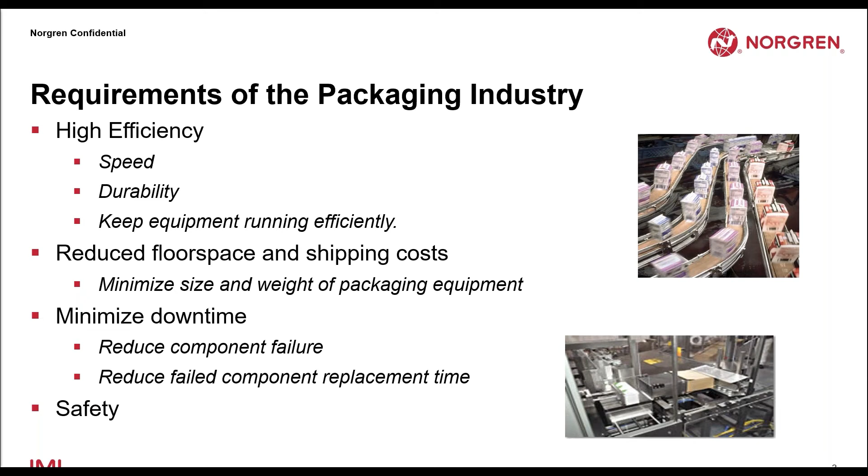So air preparation can provide solutions for many of those issues. Filters, regulators, lubricators, or FRLs, can affect the speed, efficiency, durability, quality, downtime, and safety of the system. We'll go into a little bit more detail as we go into this. Also, their size and weight can affect the envelope size, therefore the floor space, and also shipping costs. You have a bunch of heavy components on the equipment, and it affects shipping costs.

Shut-off valves and soft start dump valves are items that people just generally don't even think about. And again, it affects safety, durability, and the downtime of the line, and we'll talk a little bit more about that.

And finally, pressure switches and sensors. We're in a world where we want to have more control, more information, more connectivity. What pressure switches and sensors do is allow you to monitor and control different equipment, and it affects efficiency, durability, quality, and downtime. So all these three items are key to meet some of those characteristics we talked about in the original slide.

Norgren has been a leader in air prep for many, many years, back from when Carl Norgren invented the first inline lubricator in 1927. We've had our flagship Excelon line for many years, and it's been the dominant air prep unit in the industry. Now we have our new Excelon Plus range, and we're really excited about it.

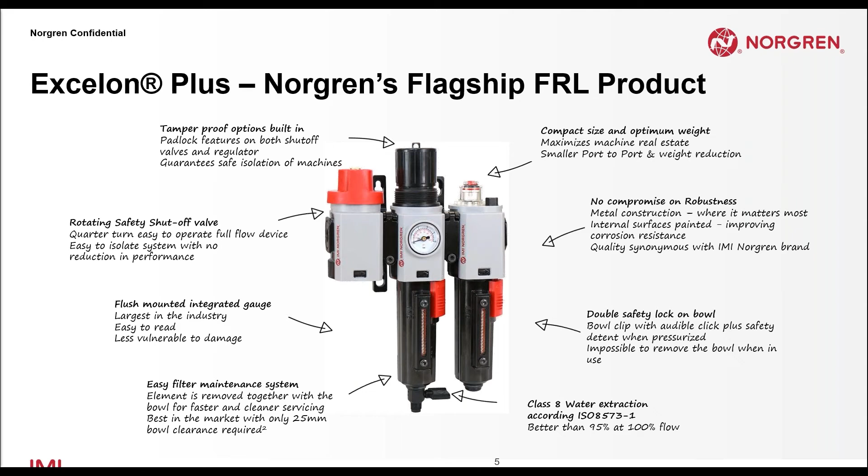Now let's talk about the keys in pneumatics. Speed is critical, as we mentioned, and speed is equal to flow. For the Excelon Plus, you need plenty of flow, and this unit has extreme flow for its envelope size. You want to get the most flow you can out of the smallest envelope, and the Excelon Plus does an outstanding job of that.

We've got flow demands from 65 SCFM to 265 SCFM, which will handle most of your requirements. We do have bigger units that aren't on our flagship range that are modular, which will allow you to get to much higher flows too if you absolutely need it. But generally, when you're in these ranges, you'll be able to get the flow you need in the smallest envelope size there is.

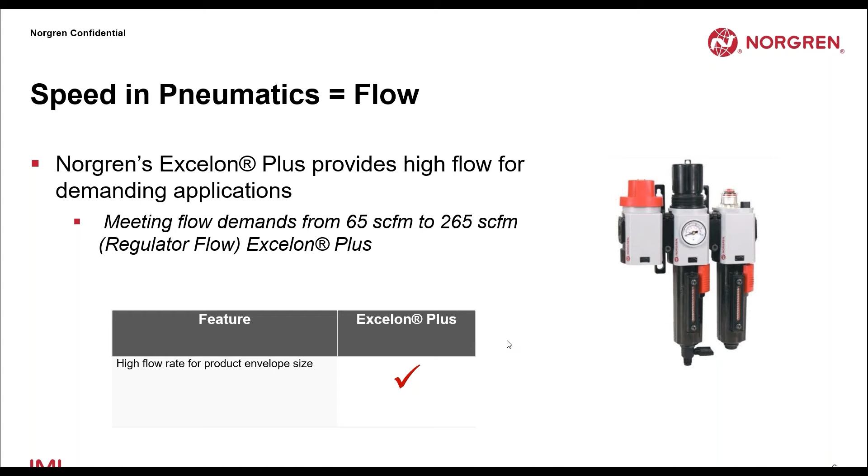Another key item we want to be concerned about in the packaging industry is durability. We talked about wanting to keep that equipment running - it's high speed, we need to keep equipment running, we need stuff moving fast. So we don't want any of our components breaking down. It's key that all the components are durable.

In the case of Excelon Plus, a lot of people look at this and think, oh, it's a plastic unit, so it's probably not very durable. But as you can see, you take off these covers and all the key parts are metal. Very similar to what we have in our previous flagship Excelon range, which Norgren is known for having the most durable equipment in the industry for air prep. We have metal all the way through.

We have covers that cover it up, and we did that to get our weight down. In addition to being robust, we want to make sure we have that robustness at the lightest weight and size possible. We've done an excellent job with Excelon Plus, with a small port-to-port, lightweight unit and a small envelope size for the amount of flow you get. So extremely durable, high flow, lightweight, small envelope size - port-to-port is as good as anybody in the industry. Really did a fabulous job with Excelon Plus, really good for your industry.

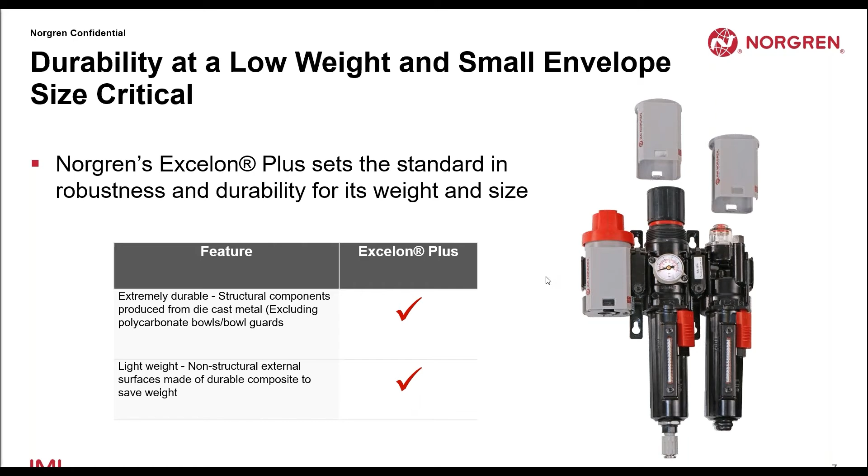Now I'll talk a little bit about modularity, because it provides reduced work time, reduced downtime, as well as increased flexibility. One of the key things is if you have something that fails, you want to be able to change it out quickly. You don't want your line to be down, and that's key in an industry like packaging, where you're moving so fast and have things going so quickly.

Our Excelon line had our Quikclamp system, and this has our Quikclamp system too. Really easy to change out parts - it's modular. If you have a product that fails, you can just loosen two screws, flip the unit open, pull out the damaged unit, replace it with the new unit, flip the two arms back up, and tighten the screws back down. So once you have that product replaced, it takes less than a minute to change this thing out. Really fast, keeps your lines up and running.

The top pictures here just show the brackets without the units, and down here shows the units. You can see how easily it works, and it really works effectively.

The other huge advantage of having these units modular is if you decide, for example, it'd be nice to have a soft start dump valve, you can add one onto your system just by adding a Quikclamp, so you don't have to do any substantial piping. It really gives you a lot of flexibility for adding components, much easier than starting from scratch.

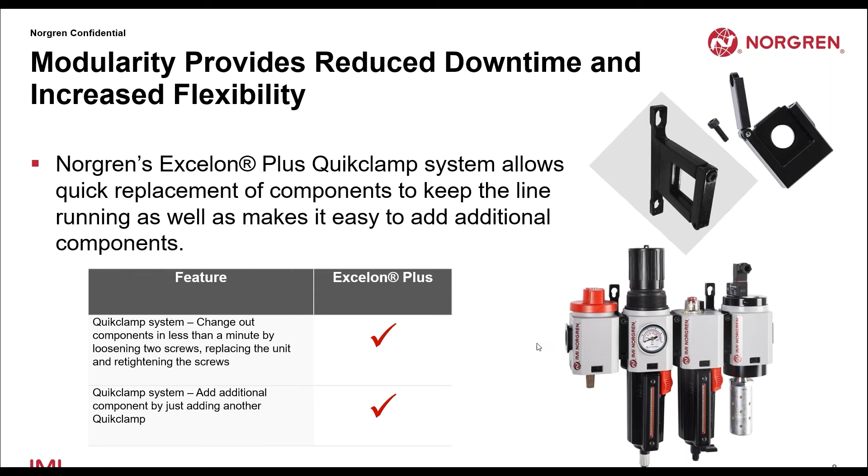Now we'll talk about some more of the individual units.

Filters are key in any system. If you look at any pneumatic component, we make valves, we make actuators, and just like everybody else's warranty, ours says that warranty is good only if you have clean, dry air. To keep equipment running efficiently, you need to keep contaminants out, and that's what filters do. If you want to stop systems from breaking down or clogging up, you really need filters.

In this case, you have a general purpose filter, and in the case of Excelon Plus, we have an industry best water extraction, meeting class 8 of the ISO standard. We are able to move out water as well as anybody, so it doesn't damage your system. Our standard filtration options are 40 and 5 microns.

Most standard packaging applications, 40 micron is fine. If you have special requirements, some specific equipment that needs greater filtration, 5 micron works. One thing to point out: a lot of people think 5 micron is better than 40 micron. It's not - it depends on what your application is.

If you use a 5 micron element in an application that could live with 40, all that means is you're going to clog up that element faster. It's going to make your compressor work more, and you'll have to change that element out more often, because these units work where once a filter element gets clogged, you replace it. So make sure you understand your application and use a 40 when you need a 40 and a 5 when you need a 5.

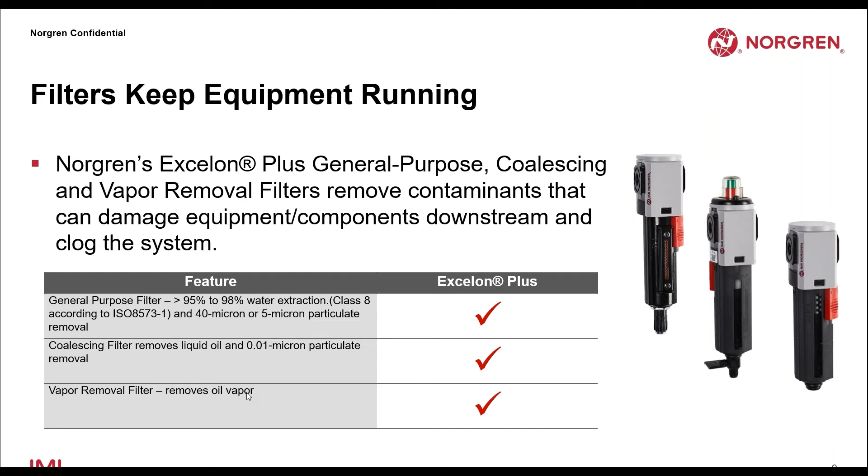Now the Norgren filters have some additional advantages - the Excelon Plus units - over some of the competition. The first thing to talk about is the dual safety lock bowl.

Again, we want to make sure this bowl is secure on there, since you're having pressures on the units. So what we have is a double locking system. At the top of the unit, there's a detent, and basically when you get that bowl in place and it's pressurized with 2 or 3 PSI, you can't get that bowl off. So once it's pressurized, you can't get it off. That's the initial locking mechanism.

In addition to that, we have a clip lock, which basically, when you turn it into place, it'll actually click or snap in place, so you know the bowl's fully engaged. To remove the bowl, you have to pull that clip down and twist it the other way around. Again, that stops that bowl potentially from vibrating loose if there's no pressure in the system, giving you additional safety to protect your employees, which of course is key in really all industries.

The other item I mentioned is that we have both manual and auto drains. With manual, you have to drain it yourself. We also have auto drains that you can pipe away. But the auto drain, once you get a certain liquid level, dumps that automatically so you don't have to worry about it. Filters, you do have to drain the bowls on occasion, or they'll stop functioning, because if they fill up with water, they'll stop functioning. So this makes it fit and forget, so you can just go ahead and remove those and take those out.

The next item on the Excelon Plus that's really a cool feature is we have cartridges - a cartridge for the element. This allows very, very quick removal. If that element is clogged, you need to change it, you can remove it, pop it out. It stays with the bowl, so you're able to just pop a unit out. You don't have to unthread stuff, tighten stuff down. It just pops that cartridge out and pops the new one in, and you're going. So really fast replacement time, which again is key to keep your lines running.

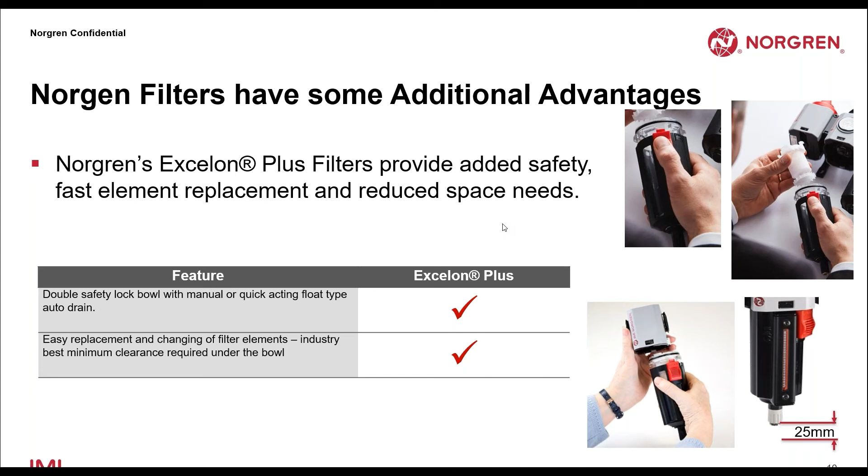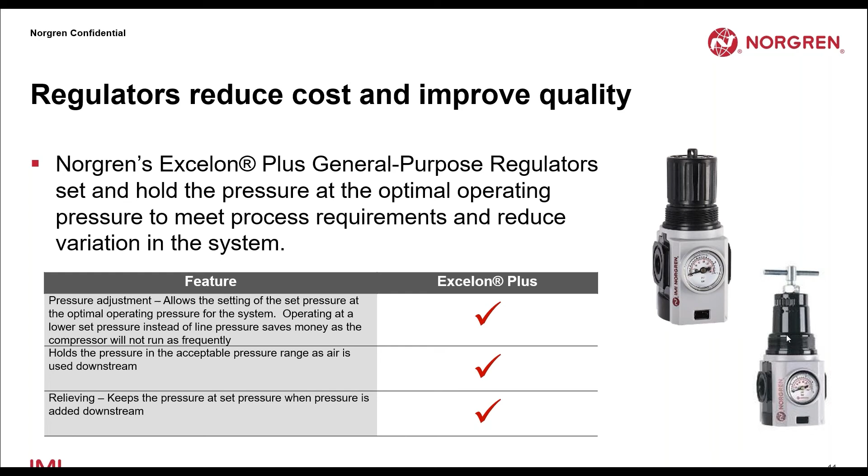So again, regulators are really key to having in your system, to both control and improve your quality, as well as reduce costs. Just to show over here on the right, how you adjust a regulator is either you turn the knob, that's a knob version, or the T-handle. Those are generally the two ways you would adjust the pressure on the regulator.

So some advantages of the Excelon Plus, the features we have that not all the competition does. Some huge items that improve process control and monitoring, as well as reduce risk.

Now, the other standard way to use a gauge, in the classic sense, is where you have a screw-in gauge. Most common damage for gauges, most common way to damage gauges, is somebody hitting it and knocking it off, breaking it off. Then your line goes down, you've got a huge leak, you've got to shut down the system, you've got to replace the gauge. By having this integrated gauge, it eliminates that as being such a high potential risk for being damaged.

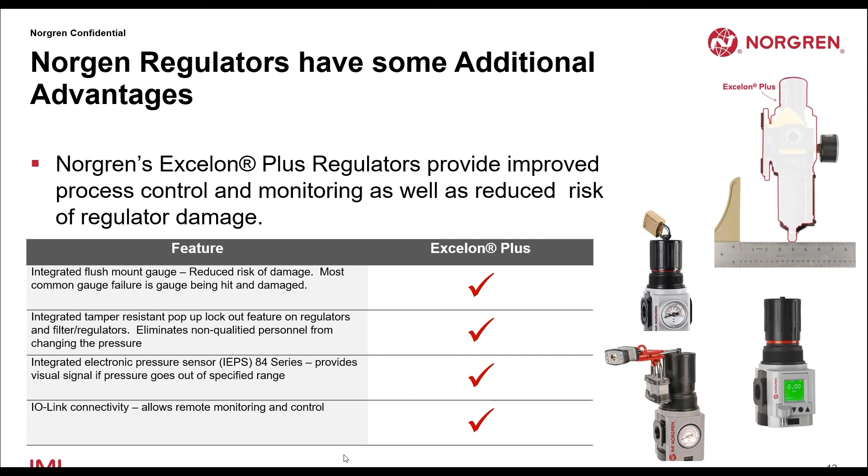All right, so one thing I just mentioned here, let's be quick.

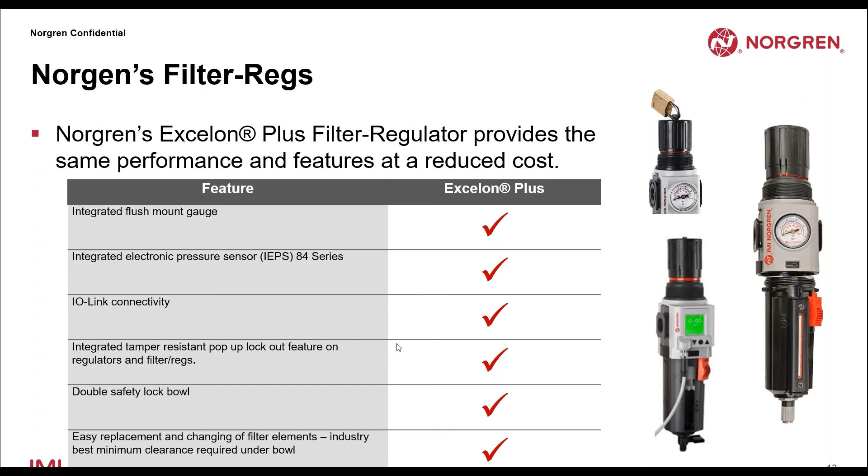We do have a filter reg. Basically it's a unit that takes the filter and the regulator and puts them together. I'm not going to talk about all the features and benefits because they're identical to the regulator and filter separately. So this allows you to get the exact same features and benefits as a filter and regulator separately, but in one unit. It saves money and saves horizontal space, so you can save money and get all the features. I will say this filter is a general purpose filter, so it doesn't come in a coalescing or vapor removal option, but they're great units to save money and space.

These units are really near and dear to my heart. I mentioned earlier that Carl Norgren, back in 1927, basically designed the first inline lubricator. He sat down at lunch with a tier 1 supplier for GM, and what they were talking about is how much their pneumatic equipment was breaking down. You can imagine, this was the start of assembly lines and pneumatic drivers and things like that.

Back then you had compression fittings - we didn't have these nice new quick connects where you could take them on and off quickly. So to lubricate those pieces of equipment, you'd have to loosen two nuts on the compression fitting, put a couple drops of oil in, tighten the two nuts down, and start up again. You can imagine that didn't happen as often as it should, so equipment was really breaking down.

It's one reason Carl Norgren is known as the father of pneumatics in some ways, because if they hadn't solved that problem, they would have probably used a different energy source other than compressed air to assemble and do these kinds of things. So lubricators are really near to our heart here at Norgren, and we like to talk about them.

Now, one thing I'd say is a lot of equipment now - we make valves, we make actuators - and our valves and actuators are not no-lube, but actually pre-lubed. All these units are pre-lubed, so there's not as much necessity for a lubricator. We thought, about 30 years ago when that happened, that our lubricator sales would really decrease, but it didn't drop as much as we thought, because even with pre-lubed units, if you use a lubricator, you can extend the life of those products by 2 to 3 times.

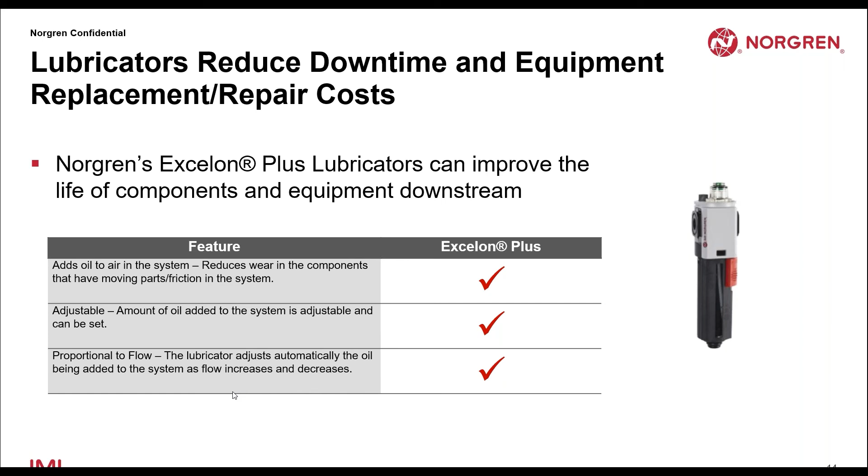This allows you to adjust the amount of oil added to the system - it's adjustable, so it can be set at a certain level. It's also proportional to flow, so as flow increases, the amount of oil increases. So you don't have to change the lubricator every time there's a little change in where the flow is at.

Now I'll talk a little bit about Norgren lubricators specifically. Basically, we provide two types of lubricators to satisfy every customer need. Most competitors have the oil fog lubricator - this is the one that's basically close to what Carl first invented back in 1927.

It provides a great amount of oil. It's almost like a rain that comes in and drops out of the air fairly quickly. So it's great to use if you need a bunch of oil, like a sawmill or something, and it's really close to the lubricator. In most cases, that may not be the case.

What we have, which is to a great deal unique to Norgren, is a microfog or mist type lubricator. It provides a fine mist of oil that keeps that oil in the air much longer. So what it's able to do is travel long distances. It's able to go uphill where oil fog will not go uphill, this will allow the oil to reach up, and it also can handle really complex circuits. So if you have a lot of bends in your piping, this oil will make it around those bends and get to the actual application. So those units are really key to have.

It also is easier to adjust because of how it functions. It's easier to make fine adjustments. So we generally recommend on most of our applications this microfog lubricator. And if you do need lubrication, definitely take a look at these units because they work fantastic. We make the best lubricators in the market.

Finally, it's similar to what we have on the filter. We do have the dual safety lock bowls. So again, we have that safety feature built into this unit.

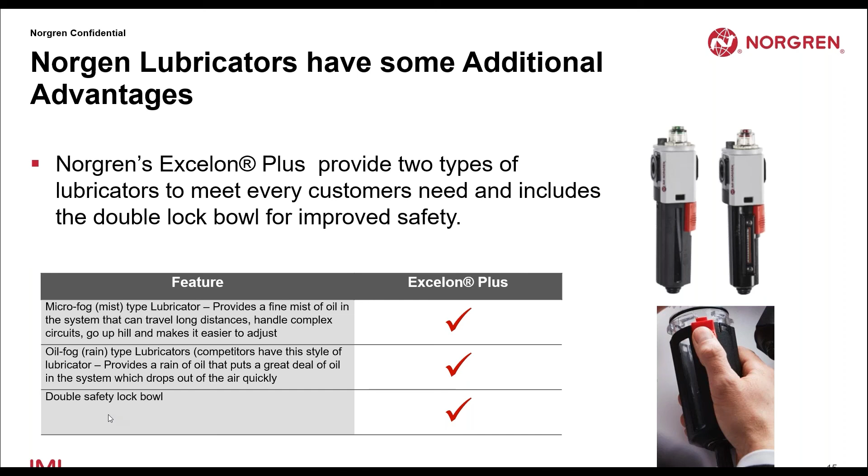So now we're talking about shutoff valves. This is something that should be in more applications and people forget about. Shutoff valves provide safety and reduce costs. Basically what this unit does is when you shut it off, it releases all the air, which is all the energy from the system, and then basically closes. So if you're doing any maintenance or anything downstream on the line, or have anything you want to do in the system, it's great to have a shutoff valve because you shut this off, it releases the energy and doesn't let energy into the system until you turn it back on.

It really can help protect folks who are doing repairs. The other time people will use it a lot is if you only have a day shift, and at the end of the shift you can go ahead and shut off this valve, because in your system you probably have hundreds of leak points where air is leaking out and having your compressor run unnecessarily. So at the end of the shift, you can use this valve to shut it off so air doesn't leak out and you don't lose that money. You can shut it off and then the next morning just turn it back on and re-energize your system.

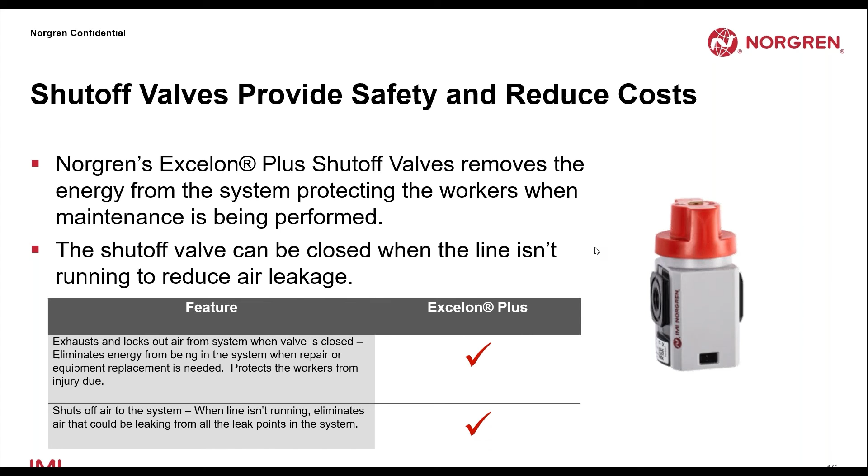Now in Norgren's case, our Excelon Plus shutoff valves have some great features that not everyone has. It's a ball type shutoff valve, which makes it really easy to turn, even for manual operation. That's certainly a benefit in most cases.

The other thing we have is an integrated locking mechanism. Basically it's lockable using a padlock, which you can see up here on the top. So in situations where someone is working on a piece of equipment, you can shut off the air and lock it so somebody can't come behind you and turn it back on. I know when I first started in the industry 30 years ago, in most cases we just used a regulator, and backed the regulator off to zero. Somebody could be working on it, and somebody could come in behind him and say, this regulator is normally at 80 PSI, and turn it back on, and all of a sudden you got equipment moving around the guy who's repairing it. This eliminates that from happening because you can lock it in place.

So these units should be on almost every air prep unit you have, because it allows you to shut off that system and protect your employees. In addition, we have a 2-lock clasp, so what you're able to do is put 2 padlocks on this unit, which gives double protection. A lot of times you'll have the supervisor of the area and the maintenance guy both have a lock.

So that way it takes both of them to agree that the system's ready to go and that they're ready to turn on the system. So they agree, they unlock it and turn it on. Not one person, it takes two people to agree that things are safe and everybody's in a safe position and it's safe to turn it on.

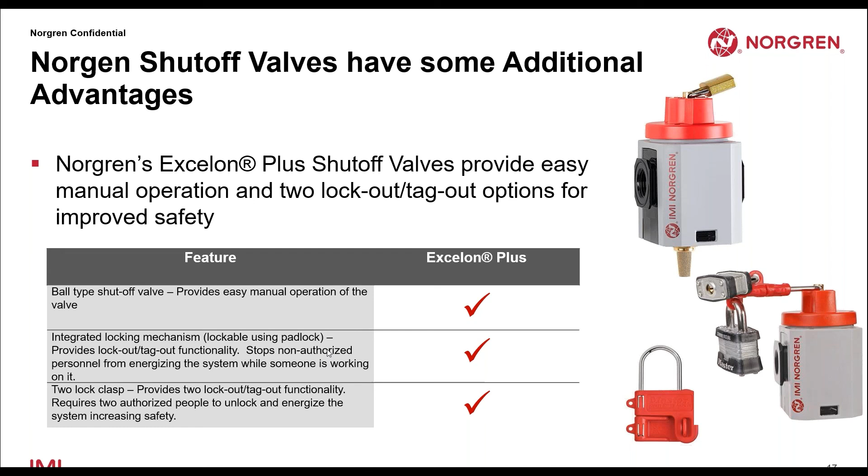So again, just some great features that really will give you a lot of benefits. All right, next item I want to talk about is a soft start dump valve. It provides safety, durability, and saves on maintenance costs and downtime.

A dump valve basically adds energy to the system slowly before going to full pressure. Think about a system where early in the morning, every time you're turning it on, if you have any moving parts that move when you energize the system, you generally want a soft start dump valve. Think of a robotic arm that moves into place when you pressurize the system. If you don't have one of these, it's going to snap into place, and it could damage the arm if it jerks into place quickly. The other thing that can happen is if somebody's around, they could be injured. So it protects both equipment and people if things move when you energize the system. Really key to do that.

You're able to signal that. You can either have it be manual, or you can have it signaled electronically. So a lot of options as far as how you turn that system on, but really key for safety.

In addition to that, this has a dump function. Basically what this does is dump air extremely quickly out of the system, lightning fast. So when you want to get the energy out right away, it'll do it fast enough to meet the OSHA standards. Now you've got to size it properly so it meets those standards, but this dumps air so fast that it will meet the OSHA requirements.

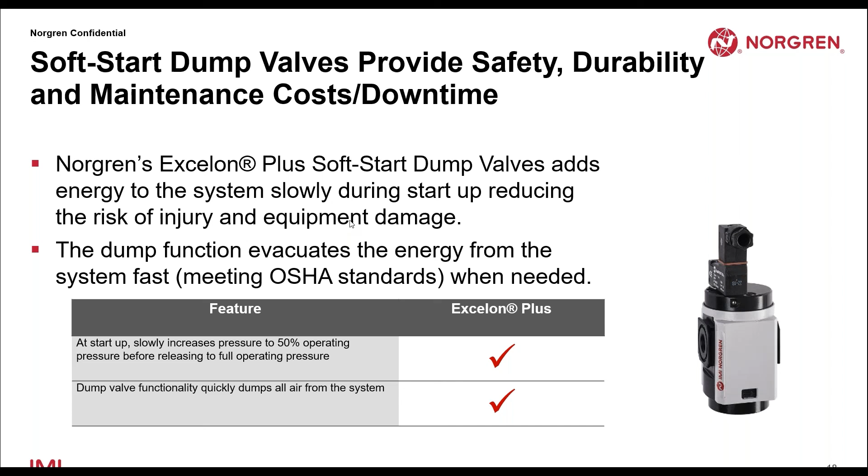Again, you can have it manual or electronic, where if the pressure in the system gets to a certain point, you want this dumping to happen via electronic signal. So again, a fabulous product for safety and really great to have in all your systems.

Now, Norgren's soft start dump valve does have some features other folks don't have. One is, as we mentioned before, it's on the modular quick clamp system. So if you decide you want to add it, it's just a matter of adding a quick clamp. You can add the system easily. Really a benefit there.

In addition, we also offer just a dump valve. So if you don't need the soft start functionality, you can order just a dump valve. And again, it's modular, so you put it in with the quick clamp.

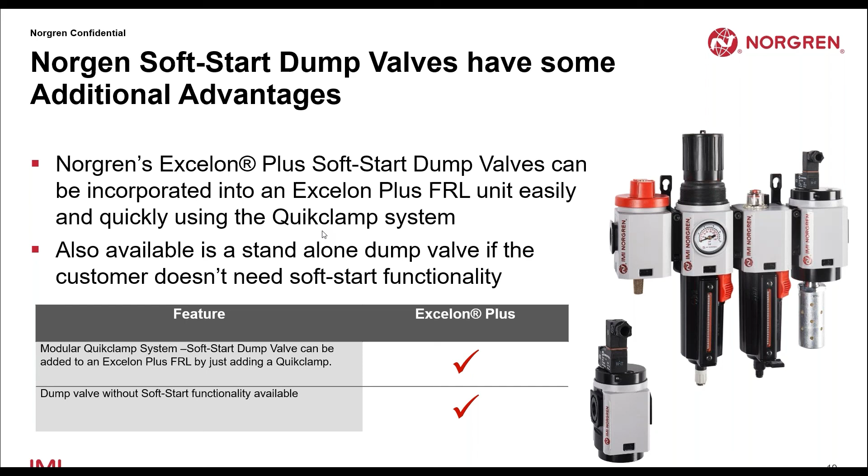All right, so now we'll move on to our final component item, which is pressure switches and sensors. This basically improves many aspects of the system, because you're able to monitor that pressure, control things, and signal things based on the pressure of the system.

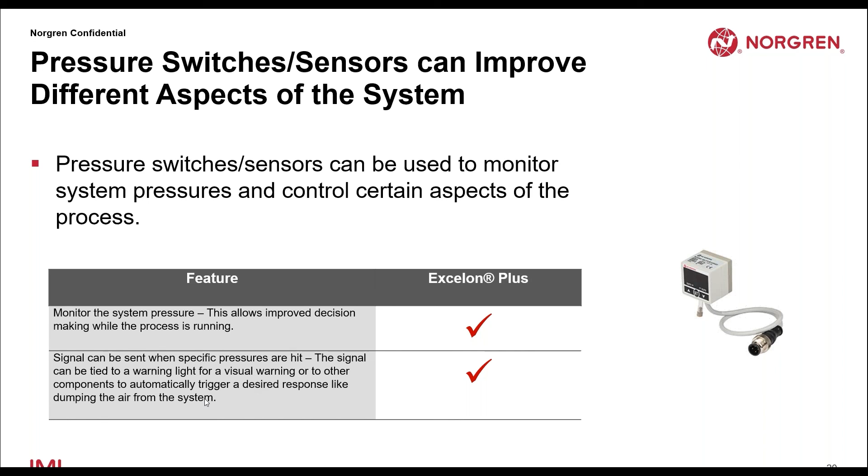So you can make decisions, you can set it up where it triggers things, as we said. You can have it trigger your dump valve, trigger other things, hook it up to a light so it gives a visual warning, a lot of things. So this gives you options where you know what the pressure is, you can act on that pressure and make decisions and control things. Really gives you a lot of options as far as what you need to do.

Now in Norgren's case, as I mentioned, we have new features. This new electronic pressure switch quick clamps right into the system. You control and send signals. And again, one thing this has as well is the IO link.

And I have these other pressure switches. We have multiple pressure switches that do multiple things: the Q84G, which is the Excelon Plus version of the pressure switch, and the 34D. This one goes to much higher pressures and is much more specific. The 34D will go to high pressures and has additional performance characteristics for harder, more difficult application situations, allowing you to do the same kind of thing.

But both of these have the IO-Link capability, which allows you to communicate with industrial networks for remote setup and access performance data for improved machine operations. So again, going this next step where we want to do communication, we want control, these things give you the ability to do that.

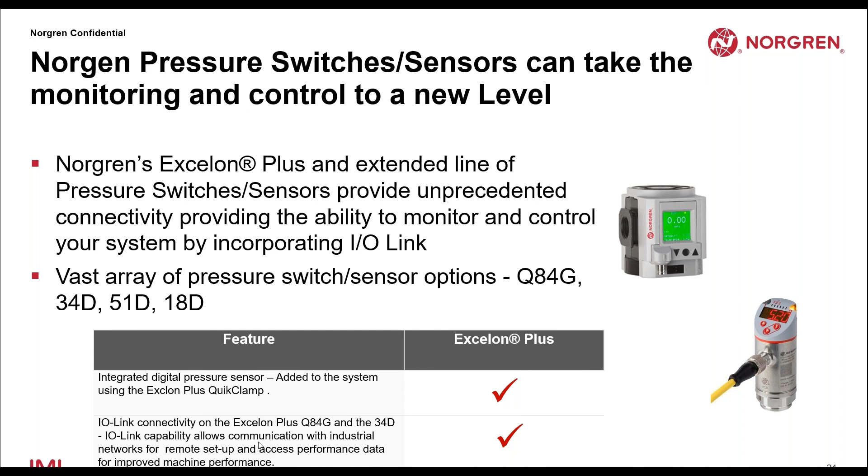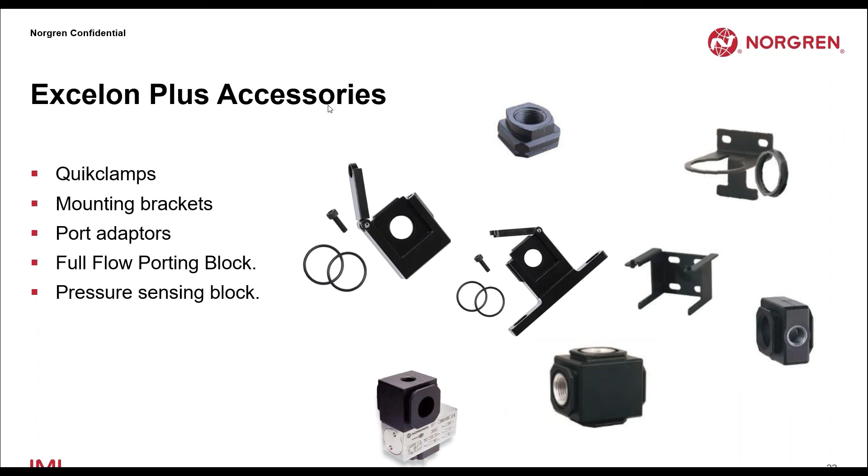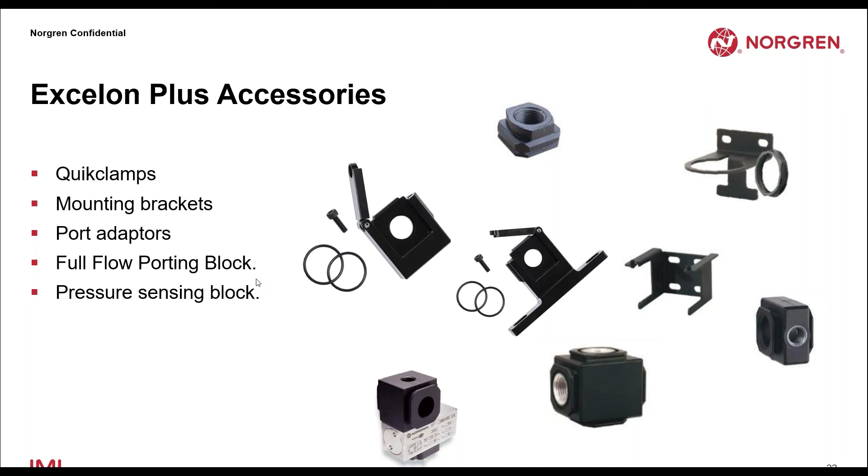So now we're nearing the end. In addition to that, we have Excelon Plus and all kinds of accessories. We talked about the quick clamps already, but we have porting blocks, pressure sensor blocks, and other kinds of mounting like panel mounts and different brackets. We have port adapters where, once you pipe these up, you never have to unthread or thread something to change out a component. You have this port adapter at the end of the quick clamp on the front and back end, and you never have to mess with your plumbing when changing out those parts. We have a lot of accessories that give you a lot of flexibility with the Excelon Plus system.

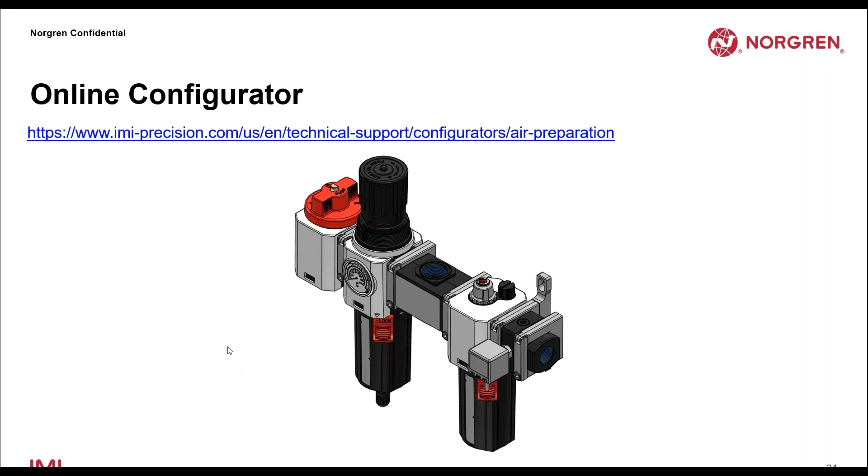I would be remiss not to mention we have a world-class online configurator where you can easily put these units together. You don't have to buy just individual components; you can buy these units configured, shipped to you, already assembled. It will put things in order so you don't make the mistake of placing a component in the wrong location, like a lubricator in front of a filter. It'll help make sure components are in the right sequence. It's a fantastic tool, so get on the website and go to that configurator to build whatever product you need to match your needs easily and effectively.

That concludes the presentation. Hopefully this has been beneficial to you. We wanted to review how air preparation can provide solutions and help people in the packaging industry. Filters, regulators, and lubricators affect speed, efficiency, durability, quality, downtime, and safety, and they can positively affect all of that. The size and weight of these units affects envelope size, floor space, and shipping costs, so getting effective units is critical. As far as flow size for envelope size, we have industry-best units.

Shutoff valves and soft start valves are items people forget about, but they can affect safety, durability, and downtime, so give thought to that. Don't forget shutoff valves, because almost every system can have one. If you have items with moving components when you start the system, consider a soft start dump valve to help with that. Finally, pressure switches and sensors—we live in a world where we want more control and communication, and these allow you to do that. In the case of Norgren, we have fantastic new products on the leading edge of technology, so make sure you take advantage of that.